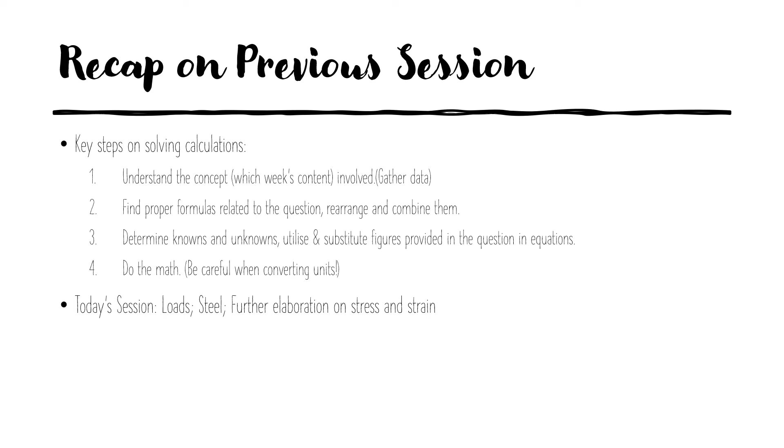Moving on, in today's session we'll be mostly talking about calculation questions relating to loads, steel, and we'll also have some further elaboration on stress and strain. The first concept I'll be covering today is loads. There are three kinds of loads you need to familiarize yourself with for this subject: the dead load, the live load, and the wind load.

Firstly, we have the dead load. The dead load is a kind of permanent load that is imposed by the building components or the building structures. The reason the dead load is permanent is that in most cases there won't be any alteration to the building structure. Thus, the load imposed by the structure or material used to construct it will not change. To calculate the dead load, simply multiply the volume of the material by the material's unit weight.

Secondly, we have the live load. The live load is a temporary load imposed by unfixed items such as people occupying the building or furniture and appliances. The reason the live load is temporary is because the people or furniture imposing this load can be easily replaced or removed.

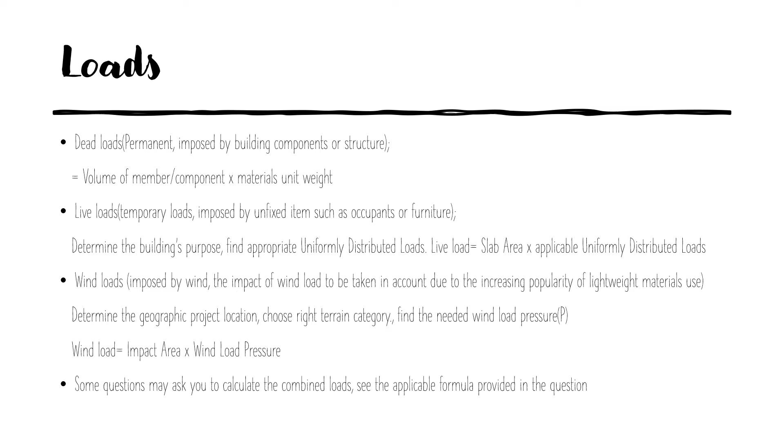Lastly, I want to remind you that some of the questions you meet may ask you to calculate the combined loads of a project. Therefore, you need to see all the applicable formulas provided in the question that you might need to solve it. Moving on, I'll walk through some of the load sample questions for you.

First question: in the graph attached below is a 220 mm thick, 6 meter long, and 4 meter wide reinforced concrete slab with 4% steel reinforcement. The question asks you to calculate the dead load of the reinforced concrete slab. As we know from the previous slide, the dead load equals the volume of the material used multiplied by the unit weight of the material.

From the table attached below, we can see that the unit weight of concrete is 24 kilonewtons per cubic meter, and for every percent of steel reinforcement, the unit weight adds 0.6 kilonewtons per cubic meter. Therefore, for the concrete slab with 4% steel reinforcement, as the question mentioned, the unit weight will be 26.4 kilonewtons per cubic meter.

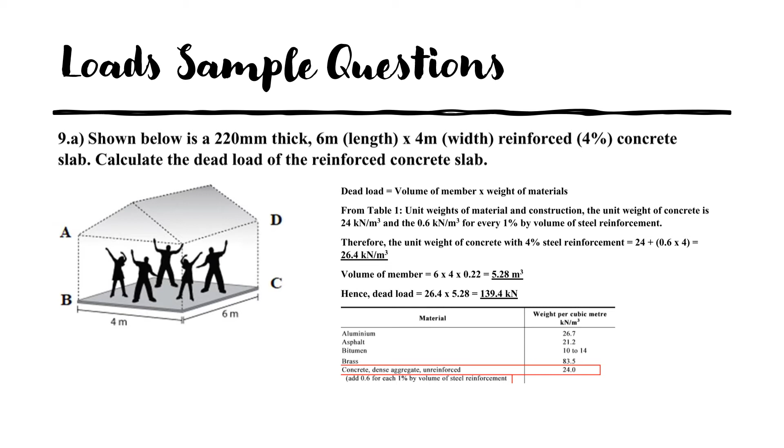Additionally, as the dimension of the slab is already provided, we can easily calculate the volume of the slab equals to 5.28 cubic meters. Lastly, simply multiply the volume by the unit weight of the material. We can get the conclusion that the dead load equals 139.4 kilonewtons for the concrete slab shown in the graph.

Moving on, now we have a question that is based on the wind load calculation. In the question, it requires you to calculate the total wind pressure on wall AB and DC based on the internal and external pressure shown below. Assume that all the other internal and external pressure does not exist if they are not shown in the graph.

If we take a look in the graph, we can see that for the wall AB, the external pressure and the internal pressure act in contrary directions. The external pressure is 12 kilopascals, while the internal pressure is 6 kilopascals. After the internal pressure and external pressure on wall AB offset each other, we can easily calculate that the wind pressure on wall AB acts at 6 kilopascals to the right side of the wall.

As for wall DC, we can see in the graph that the external pressure and the internal pressure act in the same direction. Therefore, these two pressures will act combined with each other. Thus, the wind pressure on wall DC is 12 kilopascals to the right side.

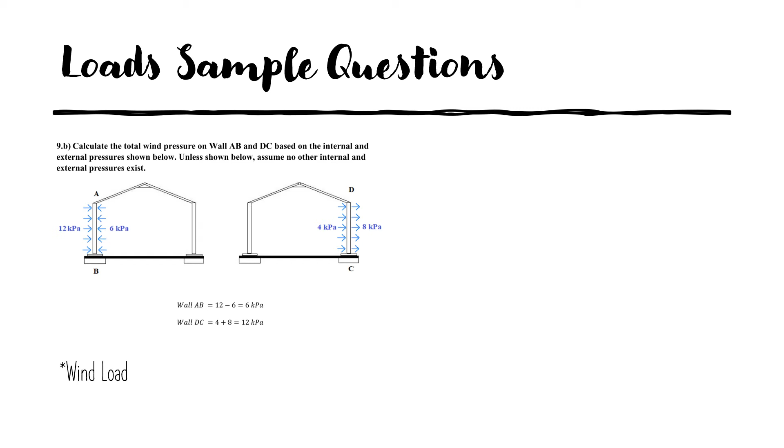Moving on, we have the last question for wind load calculations. In the question shown is a multi-story building with a story height of 4 meters, a dimension B of 6 meters, and dimension L of 10 meters. Now the question requires us to calculate the wind action on level 3. In the graph shown, we can see that the wind pressure on level 3 is 3 kPa per square meter.

Additionally, the dimension of the building is shown in the question. You can easily calculate the wind action on level 3 by multiplying the length and the story height, as well as the wind pressure on level 3, which is 3 kPa. After we do the math, we can calculate the wind action on level 3 is 120 kilonewtons.

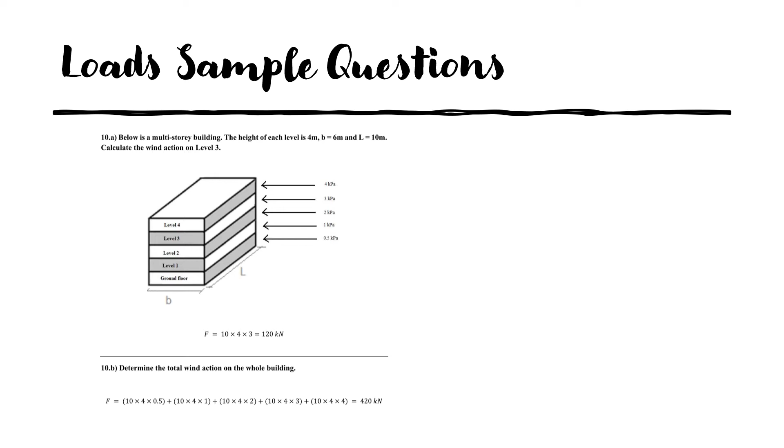Part B of the question asks us to calculate the total wind action on the entire building. As we know from the previous question, each level of the building has the same impacted area for the wind action. However, the wind pressure is different for each level. Therefore, we simply calculate the wind action of each level and combine them together. After we do the calculation, we can get the conclusion that the total wind action on the whole building is 420 kilonewtons. Moving on to the next part of our session today, steel structure.

The calculation questions on steel structure will mainly be deflection-related calculations. For the calculation of deflections, we have two formulas. One formula is used when the load to the beam is applied at a point of the beam. It's also known as point load. The other formula will be used when the load to the beam is evenly distributed or uniformly distributed. Moving on, I will now explain what the symbols in those formulas mean.

First off, we have the symbol of maximum deflection, which is calculated by the length of the beam divided by 1000. The unit for this is in millimeters. Next up, the uppercase E is usually 200,000 megapascals. This number is usually set or will be provided in your question. The lowercase w is the uniformly distributed load to the beam. The lowercase p is the point load. The uppercase I is the section property in question. The lowercase l, of course, is the length of the beam.

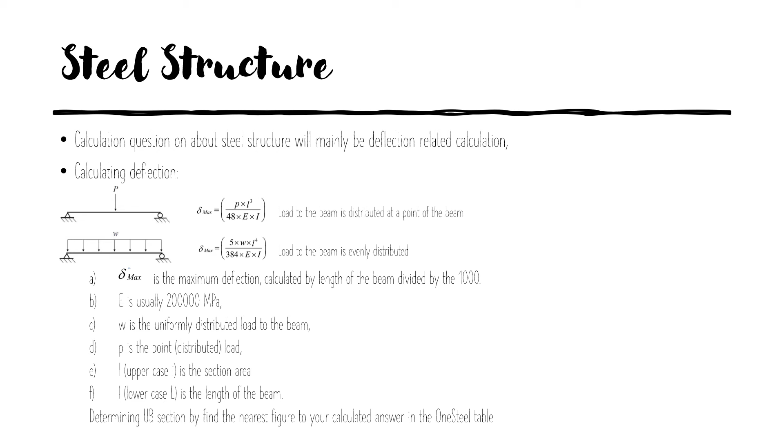Finally, the question requires you to determine the universal beam section by finding the nearest figure to the calculated answer in the OneSteel table. This table will be provided in your exam.

Moving on, we now have a question that says, a 12-meter simply supported beam is subjected to an 8 kN per meter downward uniformly distributed load. The question then asks you to determine the lightest UB section so the maximum deflection does not exceed L divided by 1000. So the first step we need to do to solve the question is to gather data.

Firstly, we know the UDL equals 8 kN per meter, which equals 8 newtons per millimeter. Then we know the length of the beam is 12,000 millimeters. After which, as I mentioned in the previous slide, the uppercase E equals 200,000 megapascals.

Additionally, the maximum deflection equals L divided by 1000, which equals 12 millimeters. The second step of solving the calculation question is to substitute all the data you have gathered in the previous step into the appropriate formula. After substituting the figures you have gathered, you can see the only unknown figure is the section area of the beam.

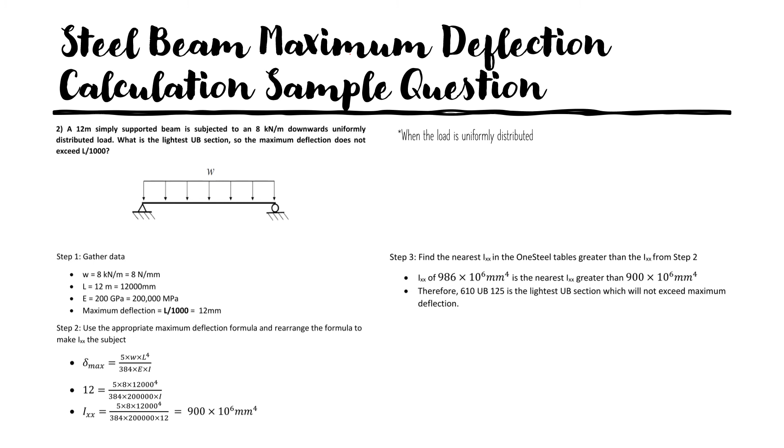After we've done the math, we can have the figure for the unknown section area. Since we now have the unknown, we can easily find the nearest section area in the OneSteel table provided. In conclusion, the section 610 UB125 will be the lightest UB section that the question requires you to determine, so that the beam does not exceed the maximum deflection.

Moving on, what we have here now is another question for determination of the lightest UB section. However, for this question, the load to the beam is applied at a point of this beam. Therefore, you will need to replace the formula of maximum deflection with a more appropriate formula for this scenario. All the other steps of solving this question will be identical to the previous question. I recommend you go through this question in your own spare time.

The three steps will be: firstly, gather data; secondly, use the appropriate maximum deflection formula and rearrange it to identify the unknown section area of the subject. Lastly, simply find the nearest section in the OneSteel table provided to you.

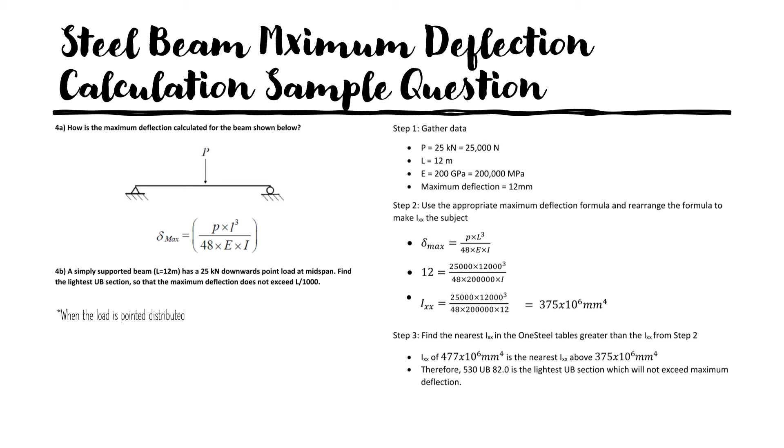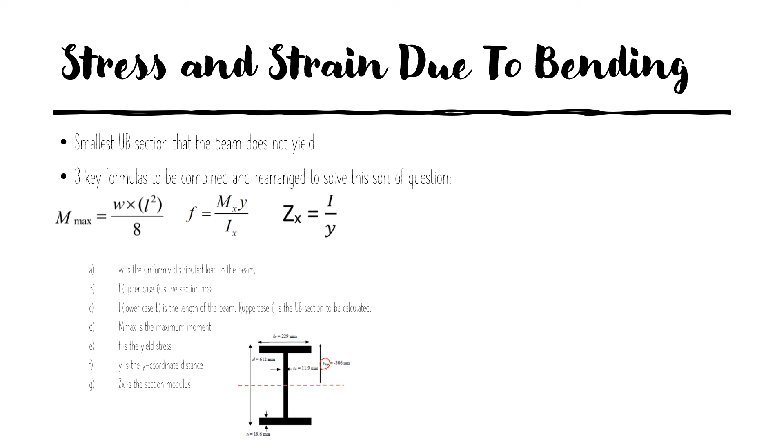Next up, we have the formula of yield stress, which equals the moment multiplied by the y-coordinate of the beam shown in the graph below, divided by the section area. Lastly, we have the section modulus, which equals the section area divided by the y-coordinate length.

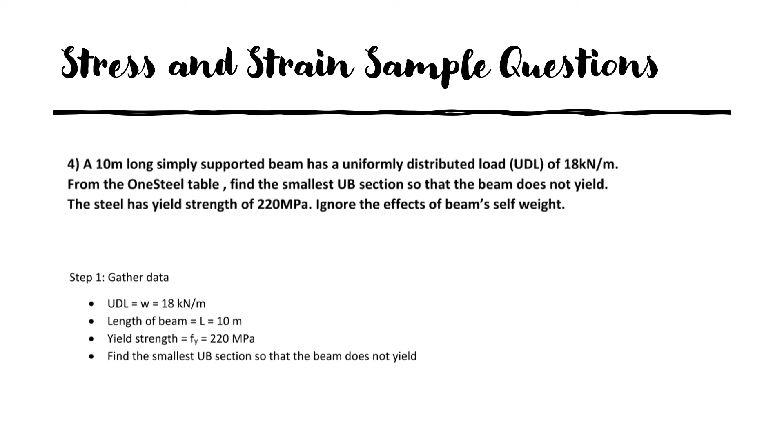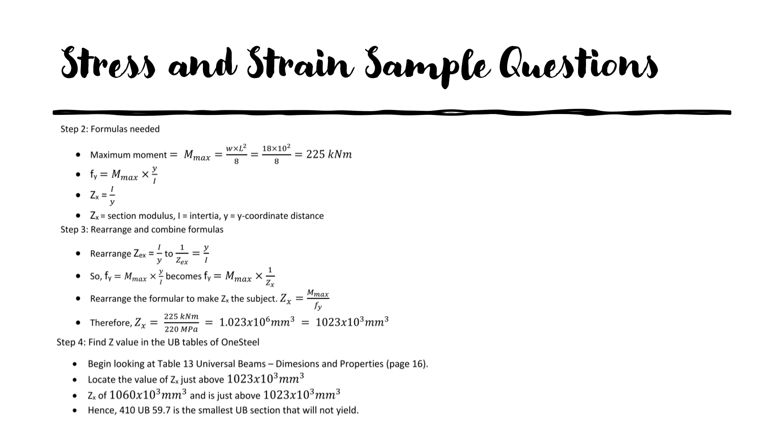Hello guys, this is the last part of our presentation today. Firstly, I would like to remind you we are now another week closer to the final exam. I would advise you to start preparing for it before it's too late. Secondly, whenever you are having any kind of difficulty understanding the concepts or working out the calculations, do not hesitate to seek help.

Third, I would like to recommend you practice your tutorial questions, especially the basic ones. These basic questions will ensure you score at least half of the marks in the final exam. Also, the final exam questions will have similar difficulty to your tutorial questions. Therefore, it is a very good idea to practice your tutorial questions as much as you can.